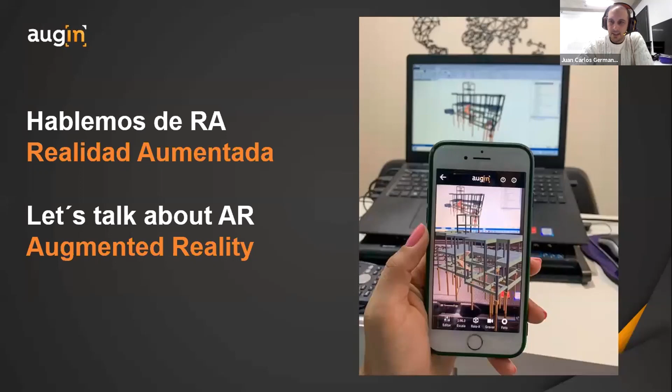So, tonight we are going to talk about augmented reality. I'm very happy to bring to all of you my experience since I started to use this technology, and I'll explain why. This is me - I'm not that strong, but I'm holding a big brick in augmented reality. The reason is because I'm owner in Brazil of a big company of bricks. We do ceramic blocks and bricks. The company name is Pauluzzi. I majored in business and postgraduated in civil engineering, and that's me holding the brick.

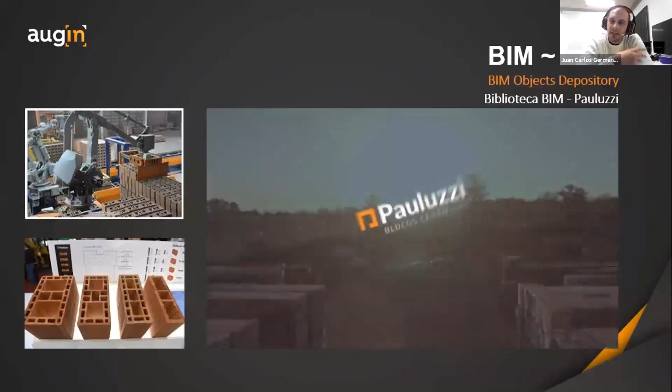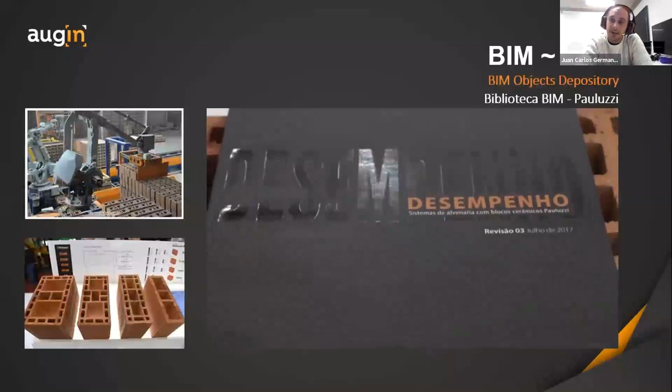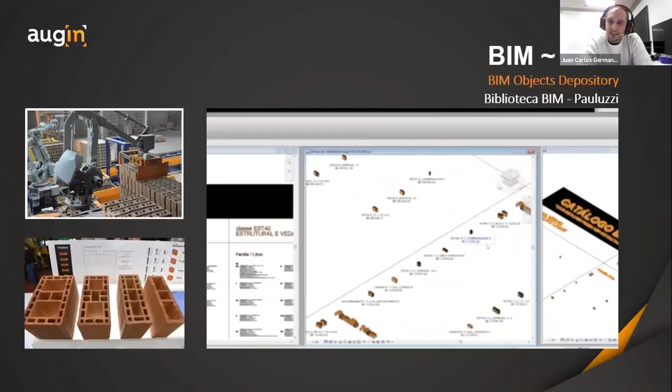By 2014, I started to hear about BIM. In meetings, people talking about BIM, and I wanted to know how me, a supplier, could enter the BIM. How can I use BIM for my company? The feedback I received at that moment was, Juan, you have a company that has all the details of your products - why don't you build a library, a repository of BIM objects for your company? So we started doing this, our first experience with BIM, and I was very surprised because in Brazil, I guess my company was the third to launch these virtual products, and I got surprised by the number of downloads people were doing. So that was my first experience with BIM.

For a big company, it's hard to keep on top, to develop new things. After that, around 2017, I was thinking about what my company can do, and then we came up with augmented reality. I was really liking the technology, and I was thinking how can I use this in my company. The idea was that we would develop a catalog of our company so that our clients or customers could see our products using augmented reality on mobile phones. I made a team to develop this, and I will show you the moment we launched this application.

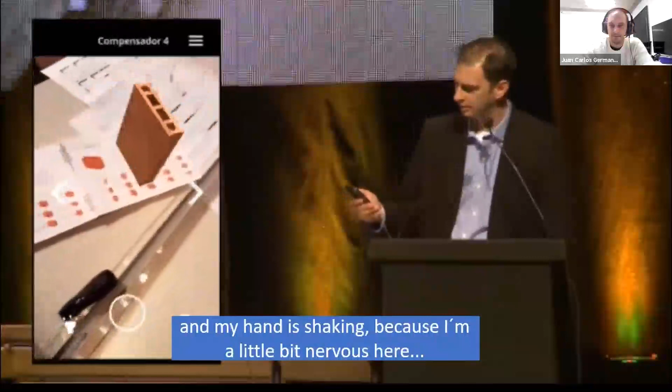But then we got this experience on how people reacted using augmented reality with something very simple, like a brick. I got surprised, and I was talking to all the people, hey, what do you think about this? But all the feedback I received was, I like to see your brick there, but I want to see my project - is it possible? And when I started to experience augmented reality, I experienced this learning capacity comparing 3D against 2D. For our catalog, the videos in augmented reality, like the Harry Potter style, were more interesting than the texts, and it had a better user experience.

It was a trend, and it could be used for training. This could be further applied to several other use cases, such as projects, procedures, appointments. It could be used on the construction site, in the owner's guide. It could be used in the university, where a student could present to his professor, or the professor could use the technology to show the students, and so many more, like marketing.

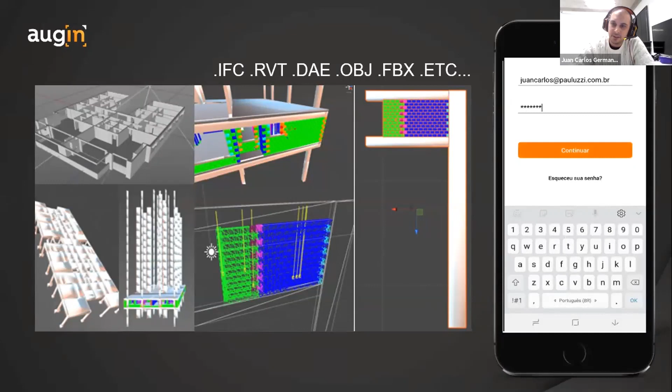But there was a problem. Me and my team, we never had experience with these files. I didn't even know what an IFC was before, but we started trying to do this. It was around 9 months of development, and everything went wrong. But until the day we could really get a file from Revit and place that model on a construction site at real scale, one-to-one.

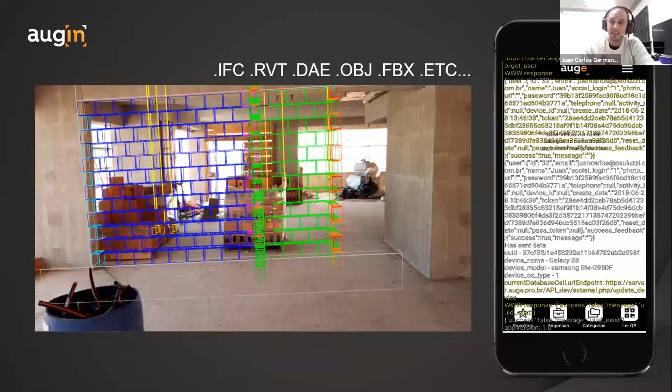And we thought, now that we did this, how can we make this all automatic? When we launched the Augin app, it was a plugin that the user could install in Revit, and with one button, he could send the model to the smartphone, open his project, and place it in augmented reality at real scale, one-to-one.

We thought people would really love this, and it seemed very easy. But the truth is, in the beginning, nobody used it, nobody knew how it could be used. We had our Instagram account where we posted some videos, and over time we saw that lots of people were liking the augmented reality videos, but nobody knew how to do it. So we thought, we need to create a tutorial about this.

And today, when a person wants to do something, somebody has already done it. So look what happened: just 3 days after we wanted to make our tutorial.

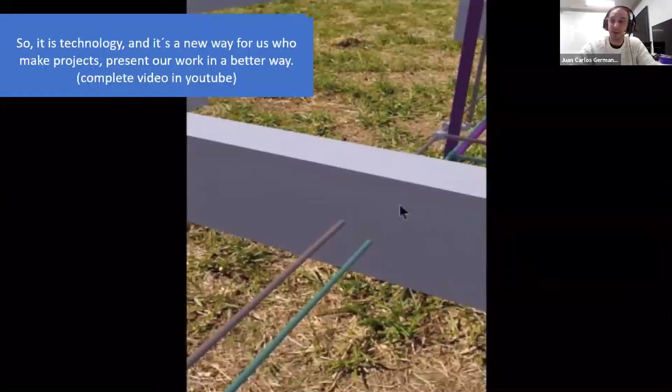So a tutorial simply appeared explaining to users how to use Augin, how to use augmented reality, and how to implement it in their projects. Suddenly we got lots of people trying and experimenting with this technology in their projects. This was something we had already validated with the bricks.

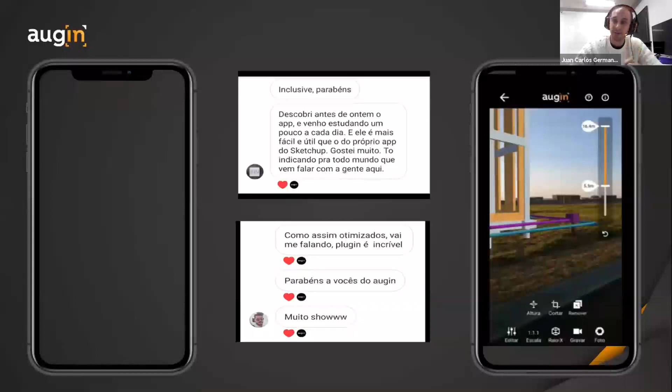Suddenly lots of feedback came in, and I will show you, for example, the opinion of a professor who uses augmented reality in his class during these days.

We are in a new era, where virtualization is just a few clicks away. However, there is no purpose if the context of virtualization is not accompanied by an objective. I am Lee Chong Lee, professor and structural engineer, and I use new technologies to demonstrate what we have in the physical world through virtual and mixed reality, using synthetic conceptualization for real implementation, with dimensions and design validated by specialist software or manual verification, both in educational and commercial areas. The focus is to avoid schedule deviations, mistakes, or changes without digital virtual planning.

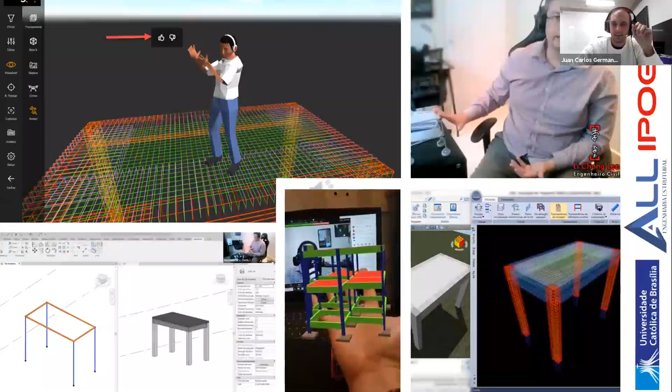With time, we saw the solution spreading into other countries. Augin was mainly Portuguese, so we started changing languages and adding new ones to the application. And today I'm going to take a look at how we can work with the augmented reality app Augin.

So first and foremost, I'm going to go to my web browser, and this is the website, augin.app. Basically today, all the content on Augin is created by the people who use the tool. We can see tutorials in Spanish, English, Vietnamese, and many other contents, and if you're interested, you can search YouTube and find a lot of tutorials around the application.

Today, Augin is present in lots of countries, and it has straight plugins to these softwares. We also receive IFC files and FBX files into the tool. Last year, our tool basically went with what users say to us, what they need. So at this moment, we collect so many opinions from the people who are using it, and we make the tool better. Like last year, they really wanted to click on each object and get the BIM information while using augmented reality, so it's something we added into this experience.

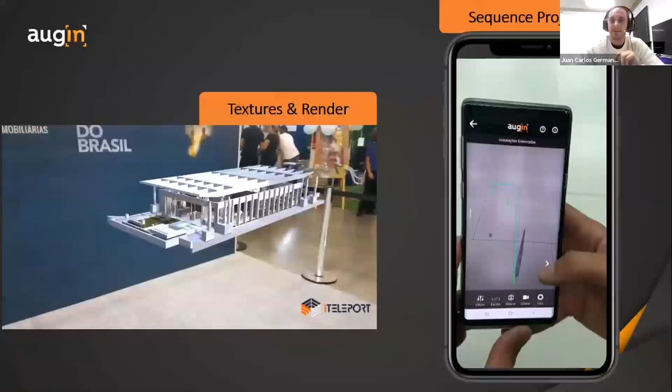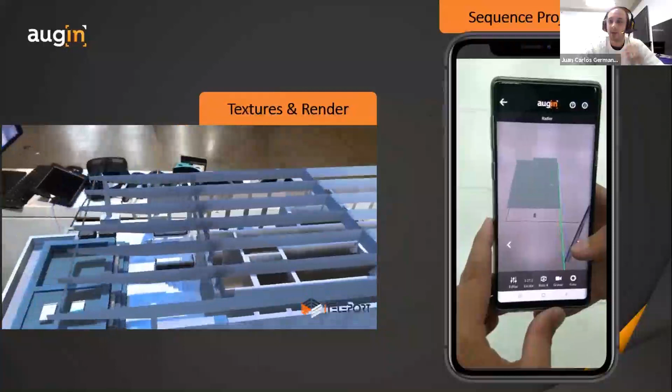In the left video, it's a construction site where they joined all the procedures explaining how each task should be done using augmented reality. We added the possibility of textures and render, also to sequence projects in AR, while you can see something going on in advance.

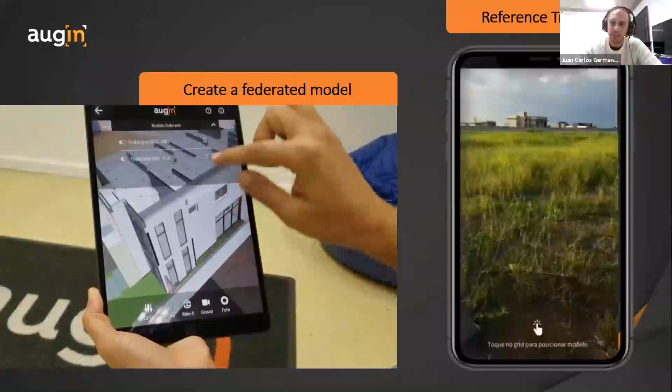And we needed to find a way to make it possible to federate a project. This was something everybody was wanting, to see more disciplines, to see more details from the project. So we developed this. And on the right video, they show a functionality that we did to make the model aligned into the real world. So a person gets a paper inside the project, and then when he aims the paper, the model turns on, aligned into the real world, like this video on the right.

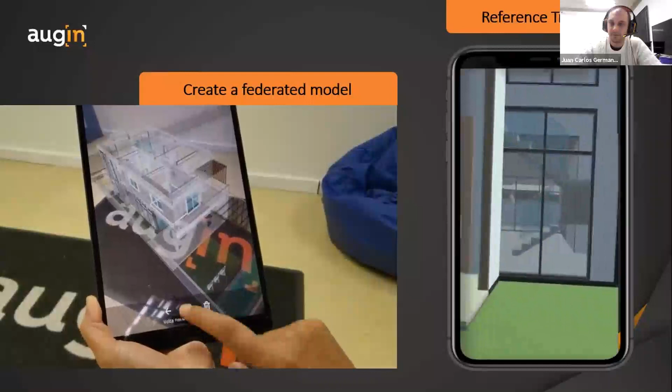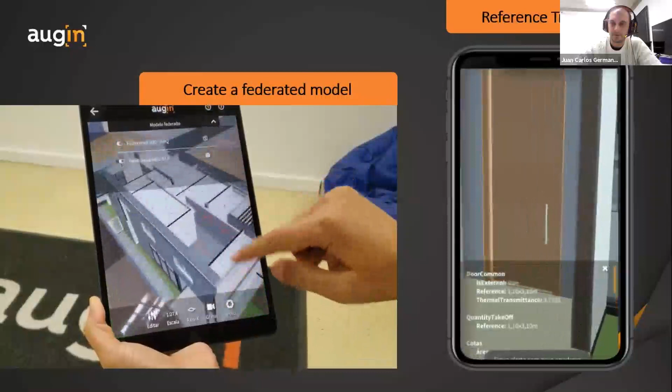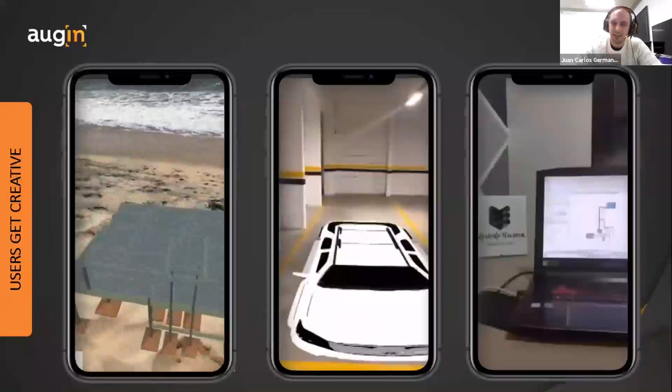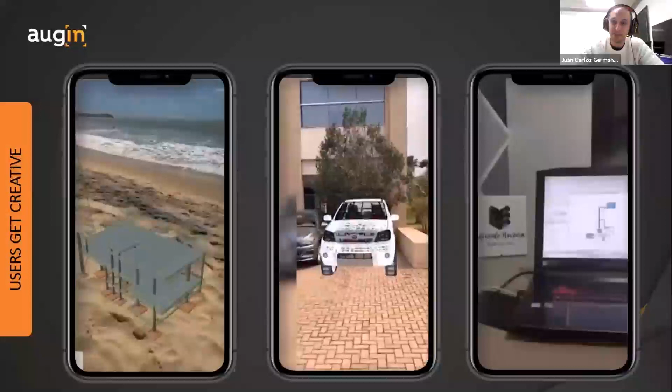All right, so the other thing we see with augmented reality is that it has so many possibilities. We see in the videos people doing meetings on the beach, really discussing the project because the project is in the pocket, like on the mobile phone. In the second video, the person is trying to show that his client's big truck would fit in the place. And in the video on the right, augmented reality can also be fun.

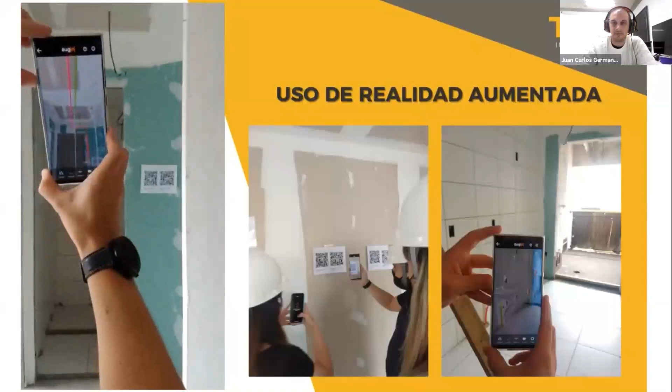All right, so we were really focused on what people wanted to see, because the BIM models are getting more complex, and we are trying to open them on a smartphone, which is not a very strong machine. So we needed to make some great advances in file opening, and it took us to also launch a desktop application of Augin.

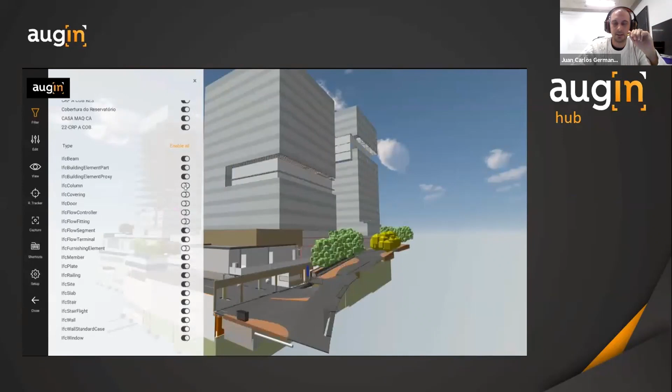This is a video of the Augin desktop application, where the user can implement the reference tracker in order to use augmented reality on site. This is a massive file in Brazil, with 52 links, almost 3 gigabytes, a project here in Porto Alegre.

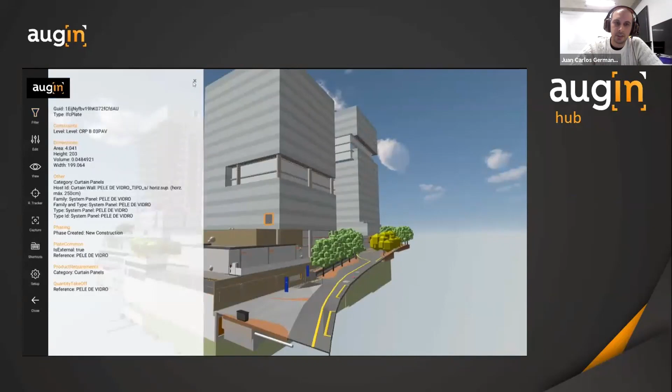With this Augin version for desktops, you can see the information of each object, and you can walk through the model with an avatar, and you can also run. People are saying it's sort of a GTA of AEC, and you can also use a drone.

And it's a tool that we did for presentation projects, and we will move on into multiplayer, where users can have several avatars and join meetings to discuss projects or present projects.

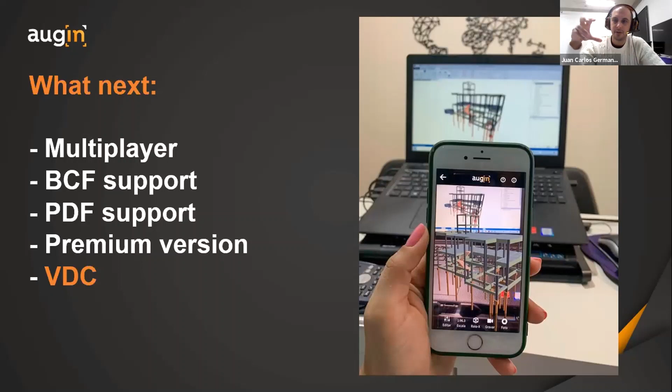The next steps for our application also deal with BCF opening and BCF export. Suppose you are in augmented reality and you want to send a BCF to somebody that is doing the project. We also want to implement documentation while using augmented reality. This is something the people suggested to us.

And we work on the premium version next, especially with VDC. In 2018, I saw the first presentation of VDC in Brazil. It was done by Leonardo Rischmoller. I really liked his application, and I started to be curious about VDC.

As I said before, I'm learning about BIM, I'm learning about VDC, and I'm very interested. I see augmented reality can be a great help with the ICE sessions, where a person can just place the model in front using a mobile phone. So no company or person needs to buy extra equipment, and they can check if the size is okay, if it looks nice, or how to correct something. I think it's a great tool for collaboration, so more people can discuss the same project on the same page.

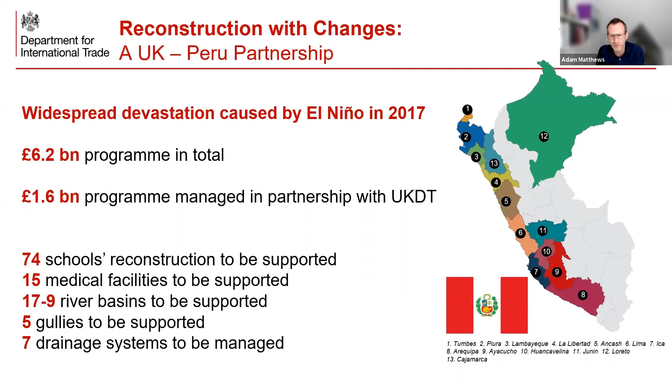Another important agenda idea, which the El Nino reconstruction is a great example of, is that it helps support the UN Sustainable Development Goals. These goals are based on the idea that we need to work towards an environment that works for people, addressing challenges like poverty, better education, and inclusivity of communities. Infrastructure, although identified as one specific item, I see running across a range of them, if not all.

So a quick look at the collaboration with Peru. We've been talking about collaboration in this session, and this started in 2019 between the UK government and the Peruvian government, signed officially by our ambassador and the Minister for MEF, Ministry for Economy and Finance. This is really about helping Peru improve its infrastructure, deliver more for better value for money, and improve society and industry at the same time.

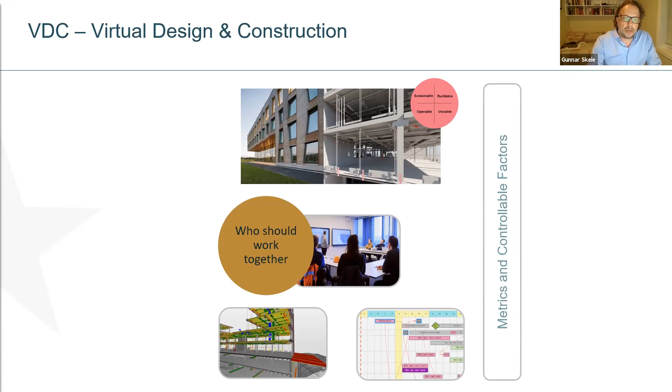As you've probably heard a lot of times during this conference, VDC is all about working together using technology to achieve high-performing buildings. This is also the foundation behind all the things that we do at VDC. This is the basis of our ideas and how we want to develop the tools that we find are missing in the industry today.

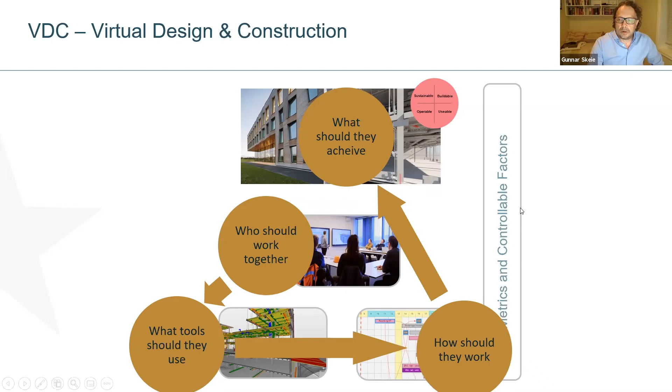At one of our visits in the US, we had several very interesting conversations with DPR and especially Dean Reed. And he once drew a sketch for us to explain some basic needs in project execution. This resonated very well with us, and we used that to shape our thoughts on how to develop tools to support our project execution.

It's all about moving from the unknown to known, figuring out what the client really needs. Here, it's about speed and alternatives. Can we create as many alternatives as possible, as fast as possible, and be certain enough about the cost and the time to build what we suggest?

When we know what the client needs, we want to move from known to done, as safe and as predictable as possible. So the focus shifts when we get into construction, now it's predictability that we are aiming for. And during the entire process, we collect data for continuous improvement so that we can be even faster and have more alternatives in the next iteration of our execution, and we can be safer and more predictable at every iteration, whether it's the next week or the next project.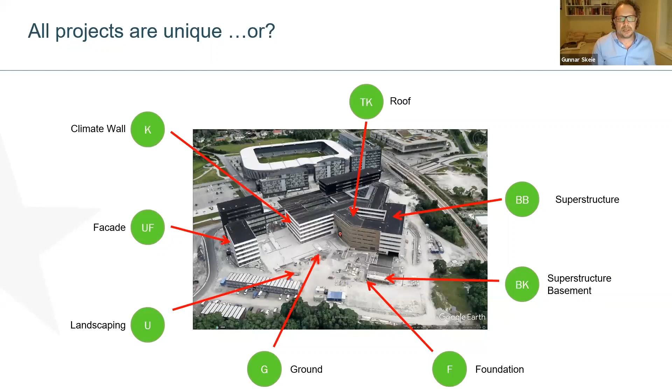That's something we have to find a solution for in every project. It's not that many categories, but for each one we say we need to find an element serving or solving the needs we have. So for this example, it's showing a solution or an element for superstructure.

For each category, we say we should have like 4 or 5 elements to solve the needs for that project. In the beginning, there were a lot of opponents from the project developers saying we need more alternatives. We said, okay, but try to narrow it down to 4 or 5 alternatives, and then we can practice and do these over and over again and become really good at those 5, making sure you spread the variation of elements to cover the needs you have.

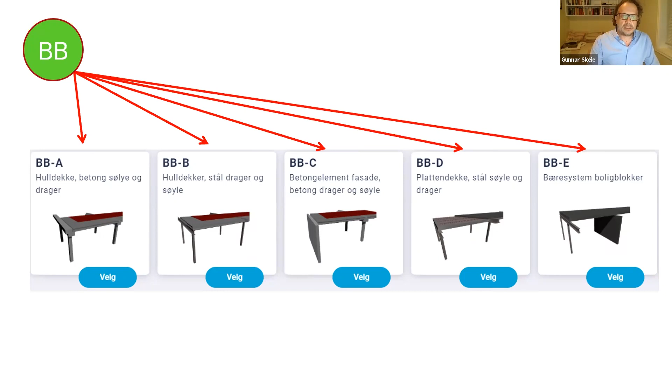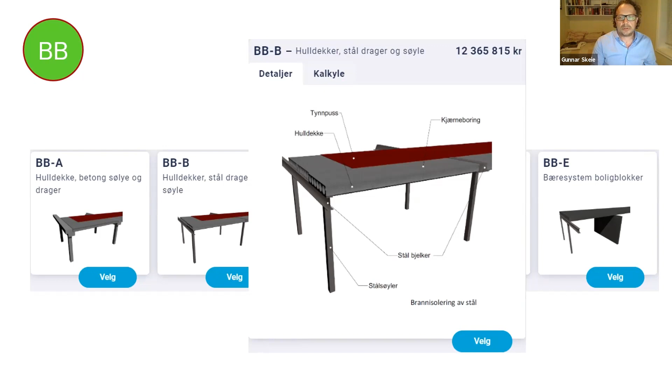In a standard project, when you solve, for this example, showing hollow slabs supported by steel beams and columns, you have selected a solution that would work in this project, and you have selected all the knowledge from the company that you have built over the last years.

Sorry, lost track of my script here.

So bricks is the foundation for everything in our solution, and it's a visual representation of all decisions made in the project. It's also a structure that enables us to capture as-built data from the site when using these to do the calculations.

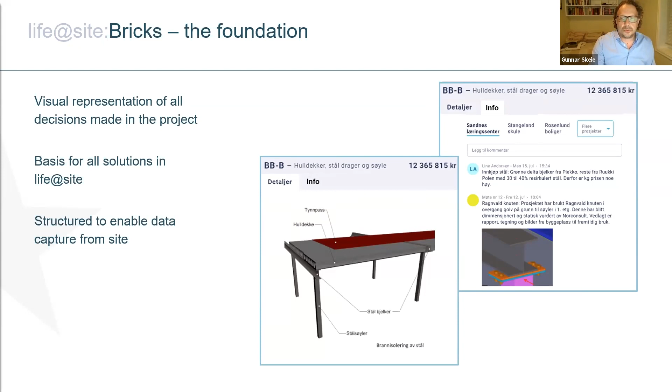We have used bricks to build form, and that's a tool to calculate while you develop or while you make decisions.

As opposed to all the other calculation tools we have seen using BIM, which calculate what's in the model, we use this to say: this is the decision, this is what we suggest to build, and this is the price, and then we model. So this is just a visual representation of all the decisions made in the development of the project.

We see that this is a great communication tool. A larger crowd can certainly be part of the discussion. They can understand what is the basis of the cost, what can we change, why is this cost, and what kind of decisions have been made in the project.

We also see that this quickly adds to the company library of knowledge. The sharing of information, knowledge, or experiences between projects really speeds up when you share it in this visual way.

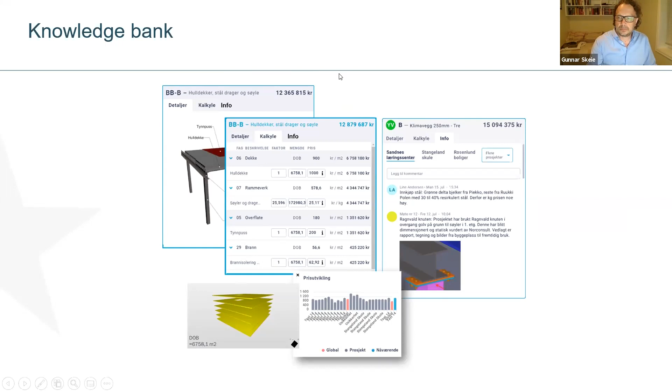We also have, when we come into construction, a tool called Build, life@site Build. That's a tool that combines the 4D BIM with the Last Planner system. It's the same collaborative process as we know from Last Planner. I know that a lot of you guys in Peru are excellent in executing Last Planner. I've seen from various VDC reports presented.

So I guess there's a lot of people familiar with that system. But this is our most mature product. This is the product that has the most use at the moment. And our aim here was to combine the simplicity that we all experience with the sticky note schedules with the power of having a 4D BIM in the background.

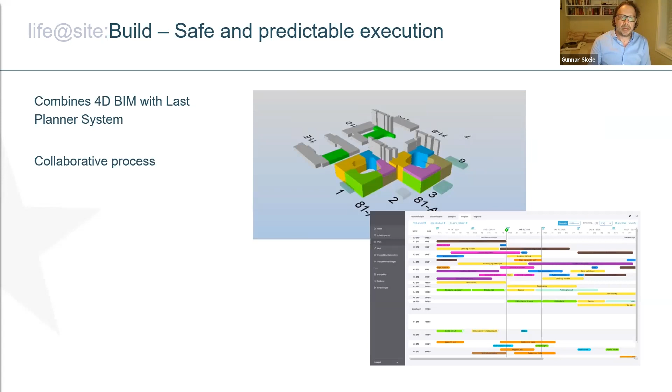So we have created one integrated schedule with tailored views to serve the purpose that we see that we need in project execution. So the top left picture is showing an overview where we have zoomed out, and you see the schedule with the milestones marked as diamonds, red or green. Green means that the milestone was met. Closed red means that the milestone was not reached, and open red means that there's a predicted delay for this milestone.

And at the top right, you can see the crew foremen discussing the weekly detailed schedule, the work plan. And at the bottom left, you will see an illustration from a 4D BIM that's behind the scenes.

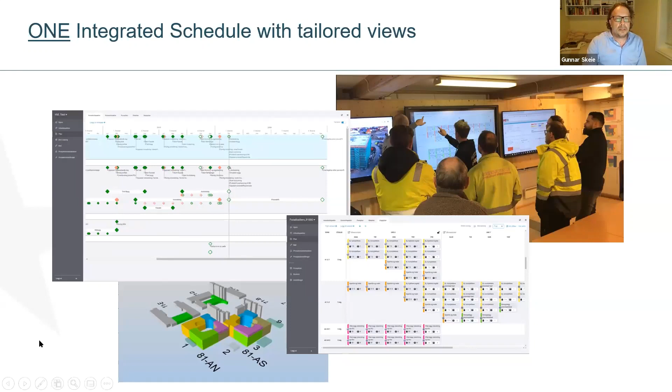So everything here is built on top of Synchro 4D, and everything is one schedule. So there is the weekly look ahead, or the bi-weekly look ahead schedules, and the weekly schedules, and the daily work operations. Everything is in the same schedule, so everything is updated. So when you finish a task, it updates the Synchro model. And the beauty of it is that this can be done without increasing the management on site.

So every trade participates in the enrichment of the schedule. Here shown by example of our trade project manager preparing for the look ahead meeting. So he can easily select his trade's activities for the coming period, and he can change the visualization and show which work packages are not sound, and he can go in and work on the constraints lacking for that work package to be sound.

So this was one of the first effects that we saw from the system: that the look ahead meetings changed from being a reporting meeting to becoming a collaborative meeting. Instead of every trade talking about 'this is sound, this is sound, this is not sound,' we can now only concentrate on multi-trade issues where we need to collaborate to avoid obstacles in the coming session.

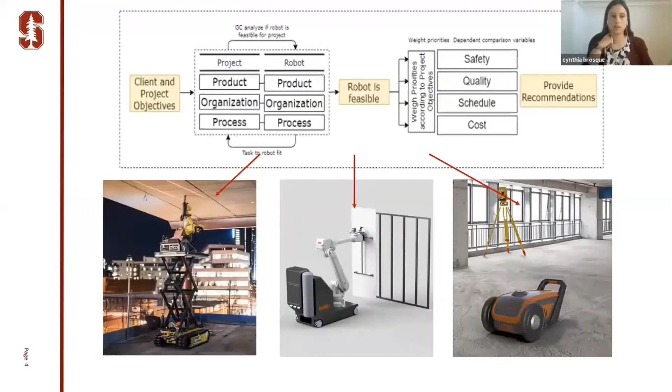Una vez que determinamos que la obra seleccionada y el robot son viables, podemos evaluar cuáles son los efectos en la seguridad, la calidad, el cronograma y el costo, y finalmente poder dar recomendaciones acerca de si deberíamos adoptar este robot o no, y por qué, y cómo también eso se traduce a cumplir algunos de los objetivos del cliente y del proyecto.

Mi idea de hoy era también poder compartir, una vez que terminamos estos 3 casos iniciales, quisimos ampliar y ver cuáles eran los resultados de utilizar este mismo método de evaluación para otros 10 robots en construcción, y también comentar un poco sobre hacia dónde está yendo la investigación y los próximos pasos para este año. Pero antes de eso quiero también tocar la conexión con VDC, con el método VDC.

Muchos de ustedes ya me imagino que están muy familiarizados con este método, así que voy a ir un poco rápido en esta parte, pero también hay varias similitudes entre el método que acabo de describir para evaluar robots en construcción y cómo también podemos relacionarlo con el VDC Framework.

Obviamente siempre comenzamos con los objetivos del cliente, porque es el cliente quien está haciendo el proyecto, y acá podemos ver algunos objetivos de usabilidad, operabilidad, sostenibilidad, que también luego se traducen a objetivos del proyecto en cuanto a seguridad, calidad, cronograma y costo. Por ejemplo, podríamos tener ciertos targets como 0 horas perdidas por incidentes en la obra, $0 sobre el costo del presupuesto, y que las inspecciones se pasen de forma satisfactoria la primera vez.

No voy a entrar en detalle en los 8 proyectos restantes, pero para darles una idea en general de cuáles fueron los resultados en cuanto a seguridad, calidad, cronograma y costo, vimos que en todos los casos los robots pudieron reducir las tareas más repetitivas y las posiciones ergonómicas más incómodas.

En 2 casos que son más de tecnologías asistivas como exoskeletons, las condiciones peligrosas de la tarea no se modificaron, ya que, por ejemplo, podemos tener al mismo trabajador trabajando en altura, pero con un soporte para realizar la tarea, aunque sigue estando en altura.

En cuanto a calidad, medimos la precisión y también el retrabajo utilizando robots versus el método tradicional. En 8 de los casos vimos que la precisión se mejora en un rango entre 25 y 90%. En 2 casos no se pudo analizar de forma cuantitativa los beneficios en la precisión.

Uno fue el caso de la maquinaria autónoma, porque en realidad se entiende que va a ser bastante similar a la calidad que se obtiene hoy en día con la maquinaria. Y el otro ejemplo fue el de los exoskeletons, porque no había suficiente data experimental sobre si el uso de estos sistemas de apoyo puede hacer que el obrero también sea más preciso.

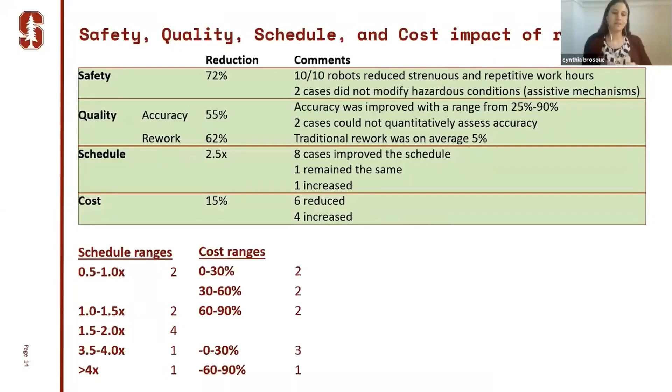Ahí podemos ver un poco más el breakdown del schedule. En cuanto al costo, también en promedio vimos una reducción del 15%. Y acá hay casi, o sea, 60-40: en 6 casos se redujo el costo, pero en 4 se incrementó.

En general, en los 10 casos que vimos, en 5 el robot fue mejor que el método tradicional en estas 4 categorías. Y encontramos muchas eficiencias en, por ejemplo, este tipo de robots que son para exteriores, muy compactos, fáciles de usar, que no requieren condicionantes especiales o setups o cambios al proceso muy grandes.

También pudimos ver en estos proyectos bajo qué características y qué circunstancias hacían que las aplicaciones sean beneficiosas, y en ciertos casos los resultados también se vieron influenciados por el costo de la mano de obra y qué tanta mano de obra se encuentra disponible, cuál es el costo de la tecnología, qué tan fácil es pasar a digital la información de la tarea y cuál es el proceso para realizarlo.

Por último, también dependiendo de distintos modelos de negocio para utilizar el robot, muchos de los robots que estudiamos, creo que 8 de los 10 casos, se ofrecen como un servicio en vez de un producto que la empresa tiene que comprar y realizar una gran inversión al principio.

La idea de esto es poder cuantificar, por ejemplo, alquilar un robot por mes o para un proyecto y cuantificar las horas y pagar por esas horas, que eso reduce un poco el riesgo de la constructora de invertir en algo tan caro como el hardware.

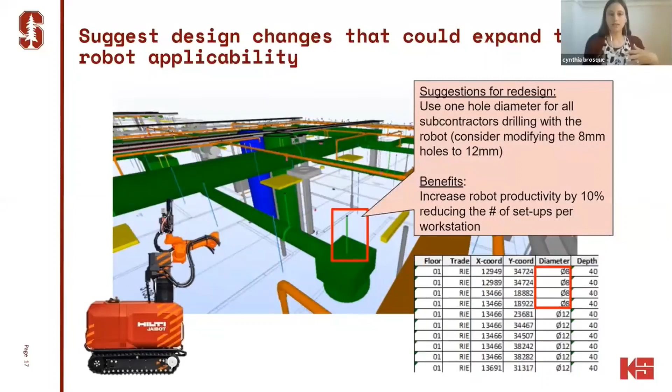Por ejemplo, en el caso de hacer las perforaciones en concreto, vimos que podría haber un beneficio en la productividad de un 10% si unificábamos el tipo de diámetros que se usaba entre los 4 subcontratos. Esto claramente no es un cambio estructural o de diseño importante para el cliente, pero a la hora de evaluar el sistema constructivo sí podría tener un gran impacto.

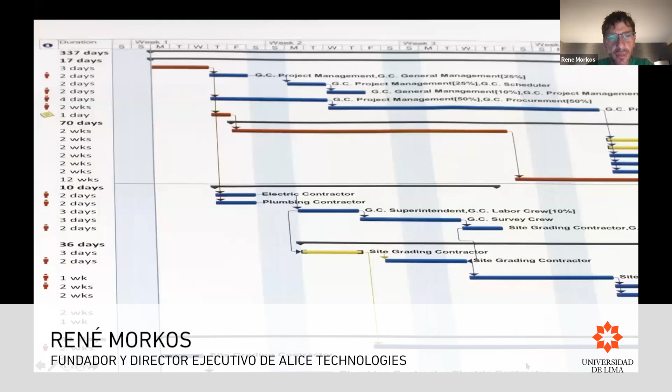Every year, 10% of world GDP is managed around the world with this. Scheduling and estimating form the two major pillars of construction management. These two technologies haven't changed since the 60s, in the last 60 years. Scheduling and estimating are still based on what I call automated technology—technology that is effectively a glorified spreadsheet.

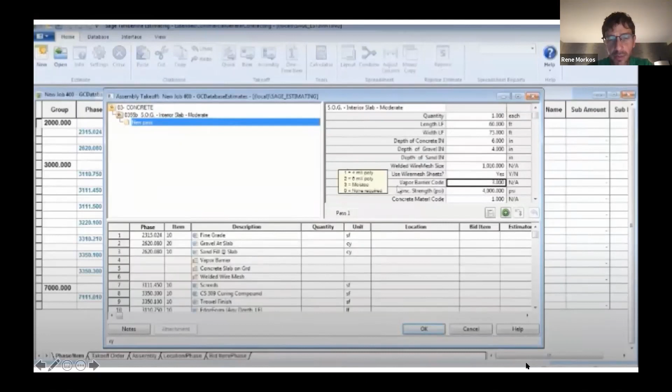That causes several problems in our industry. As you know, our industry has an average profit margin of 3%. This is an important one: resources today are assessed or figured out in the estimate, but the schedule is what is executed. So resources are figured out in your estimate, where you figure out the number of cranes, number of crews, overtime, and so on and so forth, but you go and execute your schedule.

This disconnect leads to substantial problems on a construction site. There's a high impact of uncertainty, and so in our industry, when you're late, it results in lawsuits, liquidated damages, and so on and so forth, and there's no way to really mitigate those impacts. You can't generate options or simulations. There's no way to ask a construction management system what is the best way to mitigate an impact. Today, all of that information sits in somebody's head. Somebody has to manually figure out what is the best course of action. The tools we have support those decisions, but they do not help calculate those decisions.

And finally, there's no systemized knowledge transfer. Today, most of the knowledge about how to build something is again captured in someone's head. Just like we need to figure out the problem in our head, we have to maintain knowledge of prior construction projects again in our head. If somebody leaves the company, that knowledge tends to leave with them. As a result, McKinsey & Company's report that came out, I think 3 years ago at this point, states that large construction projects are typically 80% over budget and 20% longer than scheduled.

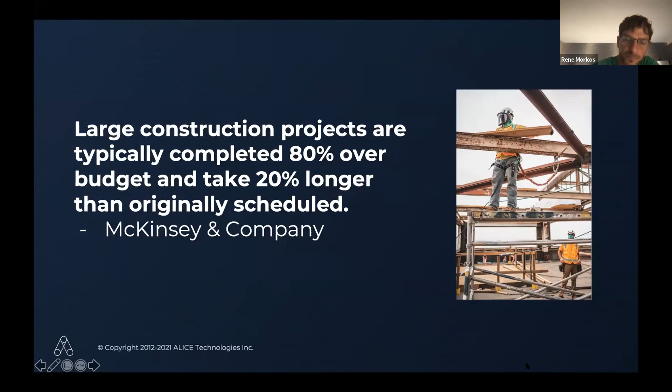So what have we done about it at ALICE Technologies? What is ALICE, and what on earth is generative construction? How does it work? Well, to introduce the technology...

What I'd like to do is introduce these 4 levels of digitization. The first level is static, the second is automated, the third is parametric, and the fourth is generative. These are levels of automation in our field that I've developed to help myself understand digitization in AEC.

The static level means drawing something on paper. The next level up, automated, means what I used to draw on paper, I now draw on the computer. So AutoCAD, estimation technology, CPM—these are all automated technologies.

The next level up is parametric and generative. If you don't know what parametric technology is, you'll be an expert in about 30 seconds. To explain parametric technology, I'll use an example of parametric design. Let's say you want to draw a cylinder—you would draw 2 ellipses and 2 lines.

Let's say you want a smaller cylinder, you have to redraw. Let's say you want a bigger cylinder, again you have to redraw. You have to redraw the object every time there's a change. With a parametric tool, you have a height and radius. You change the parameters, and the object will automatically redraw itself in the tool.

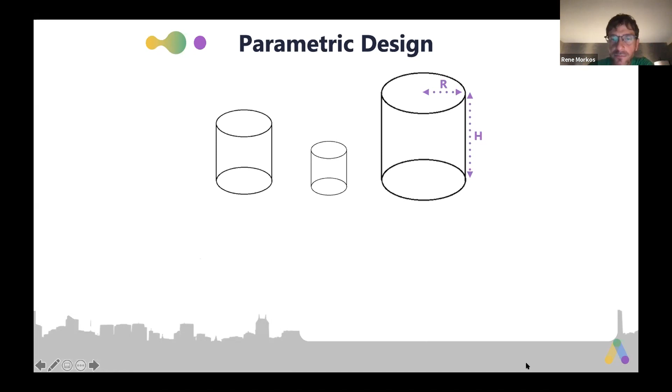This sort of revolution has been happening in our field over the last 35 years. We started with static, moved to automated, went to parametric, and then finally now we're at the generative design level.

The difference between parametric and generative design is that in generative technology, the tool changes those parameters for you. Instead of you manually having to change the parameters, you tell the tool, hey, try all parametric values from 0 to 10 by 1 foot increments. The tool generates lots and lots of options by itself, exploring them. And you tend to say, maximize the power output of the engine or minimize the energy requirements of the building.

What we have done at ALICE is the world's first generative construction tool. That's what ALICE is—a generative tool that enables you to change construction.

How does it work? It actually works in 3 main phases. In the first phase, you set up a plan, a rule set that governs your project. This is one of the big things we've done that hasn't been possible before—we've separated planning from scheduling, separated the rules that govern your construction project from the solution to those rules.

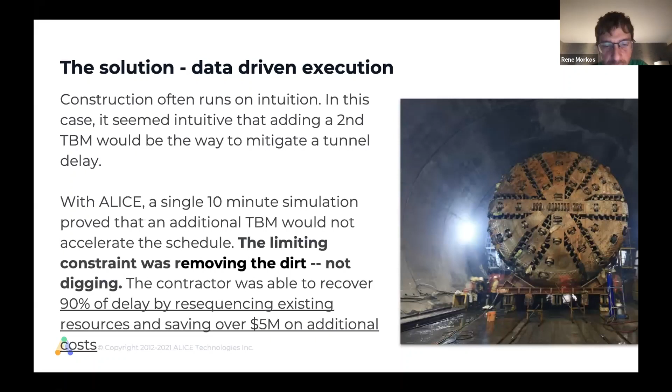You can see the results here. Scenario 1 is add a tunnel boring machine—there's no improvement in speed, but an additional cost. Scenario 2, turning the tunnel boring machine around, also didn't improve speed. With scenario 3, using drill and blast methods and resequencing, looking through 6-month sequences, we reduced the delay to 25 days from 165. So those are the results, what we could do.

With that, let me hop into the demo that I wanted to show. And so, okay—I can reload this.

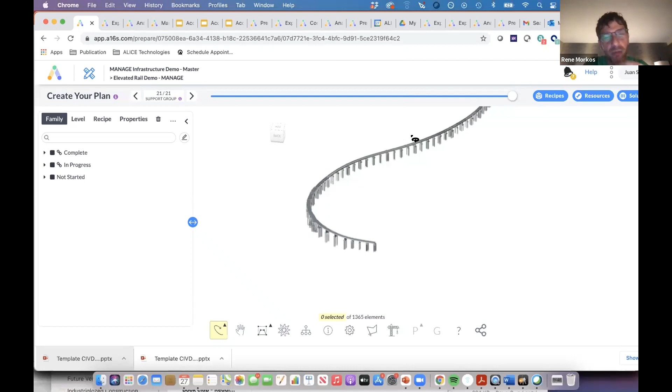So what you'll see here is that we upload a 3D model of something we want to build. Again, there are 3 phases to the software—thanks for your patience, the screen's kind of logged back on. So what you'll do is upload a 3D model of something you want to build.

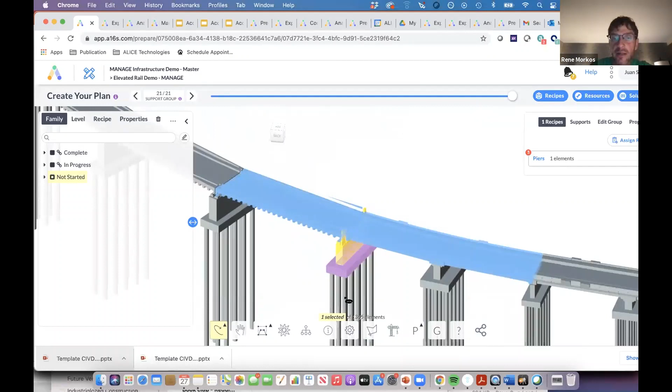You set a number of rules. Those rules are relatively simple. The first rule is which element is physically supported by which element—so you can see here that the yellow pier cap is supported by the piers and supports the roadway. So rule number 1 is physical constraints, an important rule in construction. Rule number 2 is grouping and splitting—you select the columns you want to group and say these are going to be built in one go.

And rule number 3 is what we call recipes. So what I need to do is tell the software how you build a pier cap.

So to build a pier cap, I have to put some formwork, put some steel, pour the pier cap, cure the pier cap, and strip the pier cap.

And what you'll notice is that each of these tasks has some resources. I have to put up a carpenter crew, I need a mobile crane, and a duration. And that duration, as you can see, is parametrically calculated.

The big difference between this generative approach and anything else is you create that recipe one time and apply it to all the slabs, or create it one time for the piers and apply it to all the piers. You can create 30 recipes. Those recipes generate about 5,500 tasks.

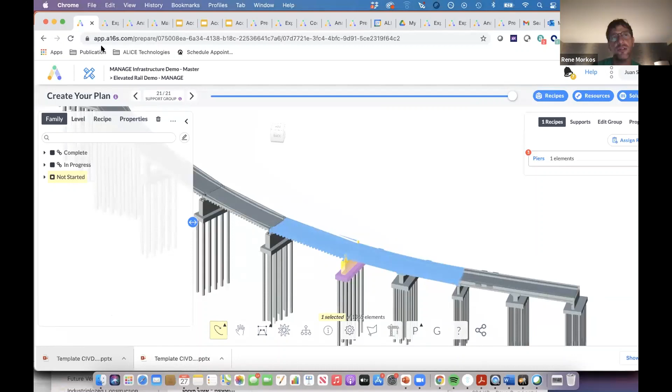When you can see then, and this is the big deal, step 2 is generating options, right? Humans are very good at understanding construction, gut sense. I know the rules, I'm going to tell the machine the rules. That's what I'm good at. Let the machine crunch the rules for me. And this is a big deal.

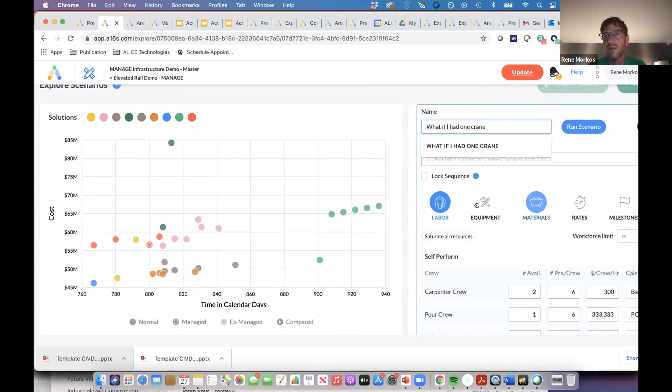Just to give a brief idea, all it takes is you hit the what-if button on the crane, for example, go to equipment, change that 4 to 1, hit run scenario, and that's it. The software will now resolve 14 constraint types across 5,500 tasks for the duration, 700 days of the project.

Then you can click on these dots and expand them. And what you'll see here is an automatically generated Gantt view, a Gantt chart that you're very familiar with. This is generated automatically by the computer and a 4D model of what you want to build. This has not been done before.

Also, what you can now start doing is advanced analytics, right? You can, for example, see that my carpenter crews - I have 3 carpenter crews available, but I only use the 3rd crew in one day. I probably want to rerun the simulation with 2 crews. These are the sort of questions you can start asking and answering, right?

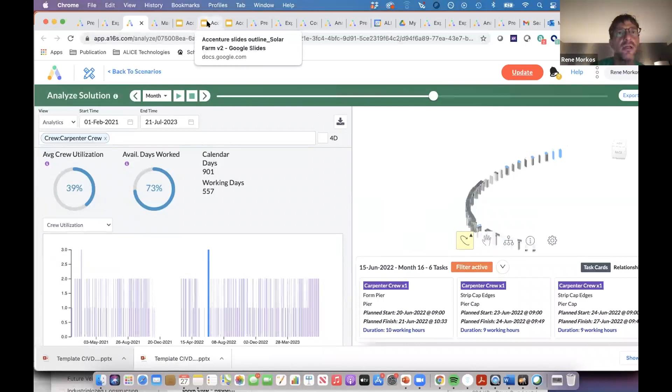You can optimize for multiple objectives: cost, duration, time, minimizing total number of crews, specific crew number, and so on and so forth. Like I said, you can generate about 600 million different ways to build a given construction project and tell the software to select different objectives that you want.

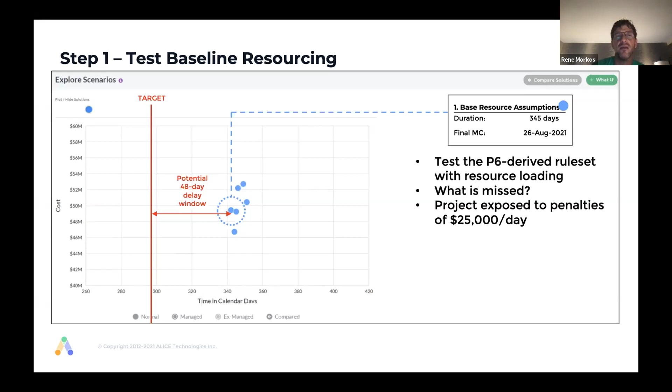So we took that information and ran it through ALICE. We flooded the software with resources—what happens if you had infinite resources? That's what we call the saturation run. ALICE found a solution that's 276 days. So not only did we match their target, we beat their target duration.

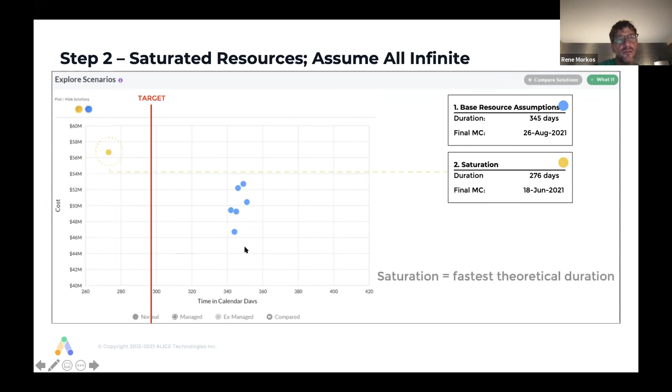The flip side is, okay ALICE, find the fastest completion time using resources very ineffectively. So ALICE did that. Now there's a 276-day completion time, but the cost has increased substantially from 50 to about 57 million. So the next thing you do is change the objective function and say, now please reduce the cost.

You can see here that we've told the software to start being smart about the way it uses resources. Now we've kept the cost down—still 276 days, but reduced the cost to about 41 million bucks. Once you've set the system up, you can very rapidly start doing these changes.